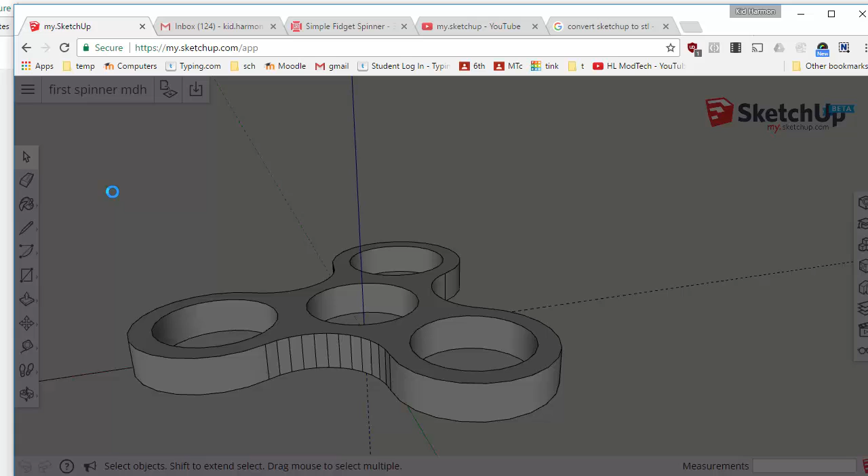I want to create a brand new design, so I'm going to go down to the templates. I always make mine with millimeters because I have intentions of printing them. This little dude shows up and I'd like to delete him.

Today I'm going to make something super simple and show you the steps on how to make it into an STL file. What I'm going to do is build a simple lighthouse.

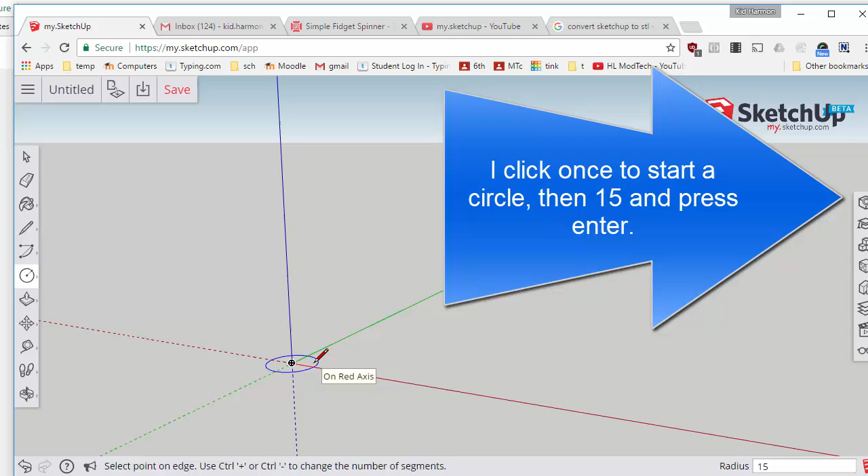I'm going to start by switching to a circle, and I always start from the center. I am going to make it with a radius of 15, so it'll be 3 centimeters wide. When I press enter, it shrinks.

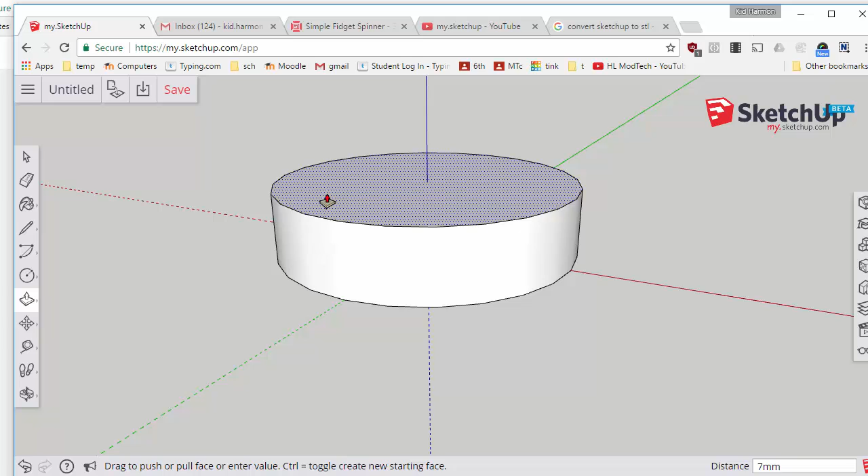I have to use my view tool so that I can get to the exact size it was. I love this zoom extents because when you make something small like I always do, that's a good way to get to it. I want to push-pull that up, and since I made it 30 wide, I'm going to make it 50 high. Then here's a cool trick I'm going to do - I'll do that zoom extents again.

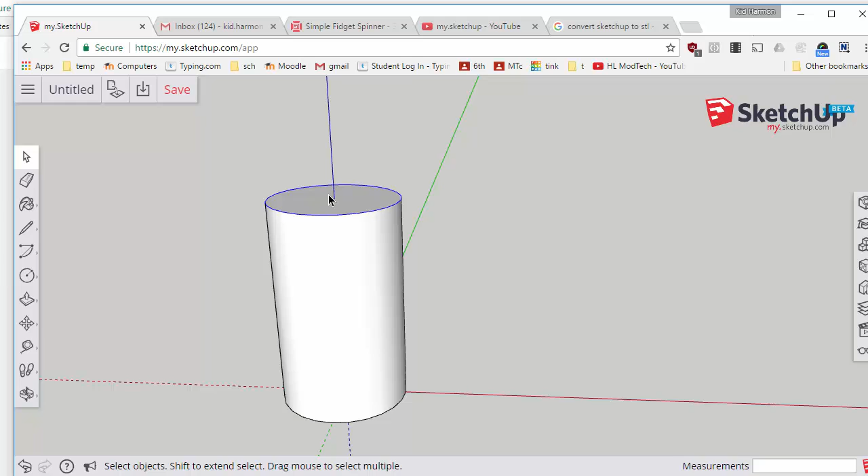If you hold down the center wheel, it lets you orbit. And then I love this trick: if you just click on the top, the outside ring, and then switch to the scale tool, you can make this a lighthouse shape by holding shift and control and making it go around center. So there's my control shift, and it's going to squeeze in the exact same amount on every side.

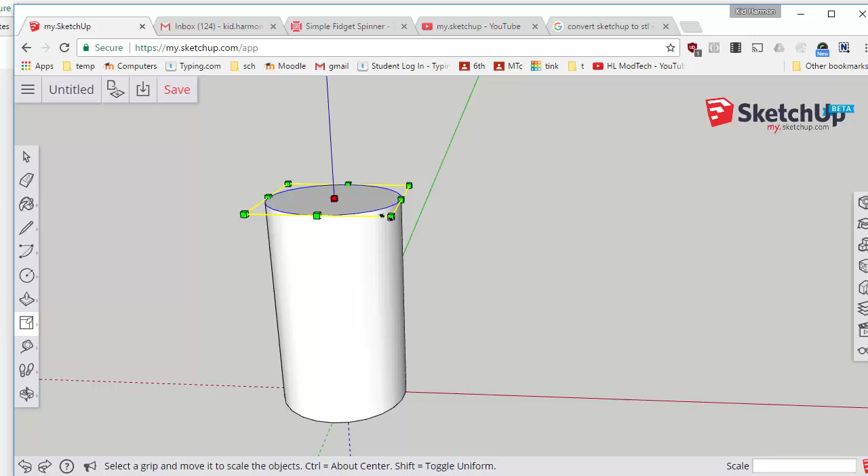It's a toggle, so I'm going to do control Z, and toggle shift. Then I'm going to hold control and make sure it comes in the same. There we go - I just had to hit shift to turn it on. Now it kind of looks like a lighthouse shape.

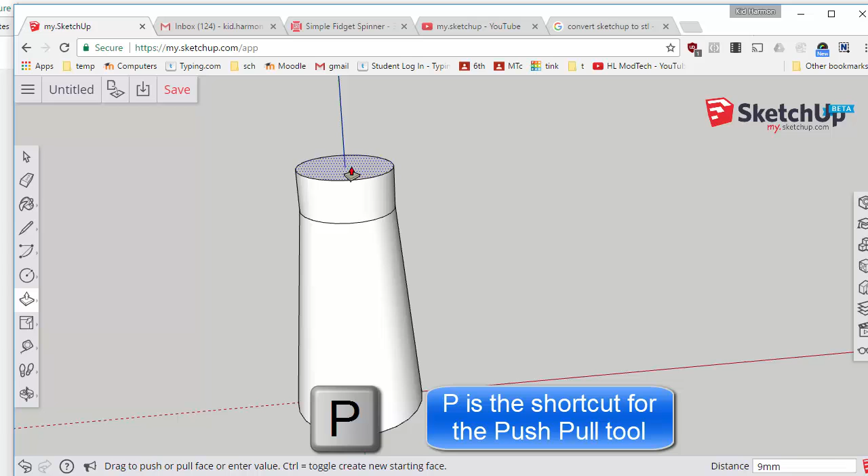I want to take this piece and lift it up so that the lighthouse has a place for the people to be in, and it'll be the same size. So I'm just going to do push-pull, and lift it up 10. Then I want to put a cone on top.

I'm going to add my cone like this. I'm going to do a straight line up, that's 10. I'm going to do a straight line out to the edge from there, and then connect it back so I've got that face.

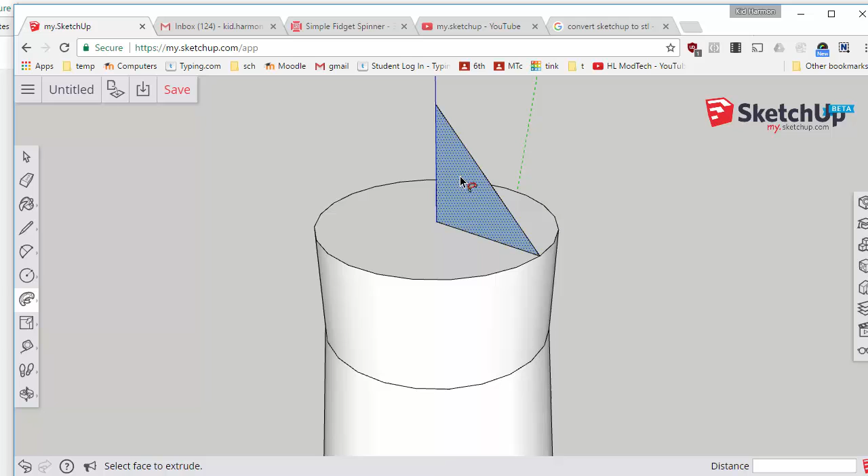Once I've got that face, I'm going to switch from whatever tool I was on to the Follow Me tool. When you click on the triangle's face and trace the edge of the circle, it creates a nice cone for your lighthouse top.

Because I'm really not building a lighthouse, my real goal is just to make something so we could export it. I'm going to hit save, put it in my SketchUp folder, and I'm going to call it Lighthouse.

So we click this dot, and down on the bottom, you can upload to the warehouse. They ask for a lot of info, and if you want to make an STL, you must make it public. You can see I've filled that in.

I will give a URL later to this video that shows you how to make it. You need to tell it you want it to be printable. Once again, if you switch it to private, they won't let you. Then you need to upload it to the 3D warehouse.

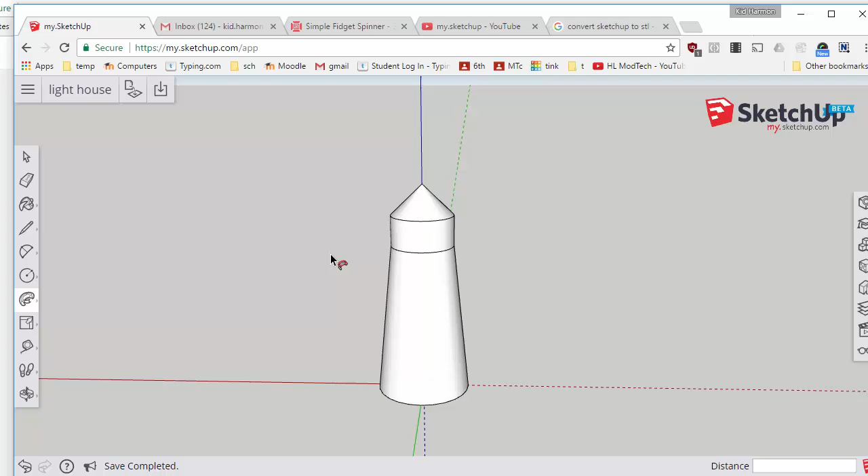At this point, you need to wait. It'll probably take 5 or 10 minutes from what I've seen so far. But I'm going to click Done, and then show you how to get to where it's going to be.

I'm typing SketchUp Warehouse. Once you get to the 3D warehouse, you need to make sure you're signed in. Since I'm in the same browser window, I am. Then when you hit this down arrow, you can choose My 3D Warehouse.

Mine finally did show up, so now I can hit on the orbit tool and it lets me look at it from every side. So now it's just like being in the system.

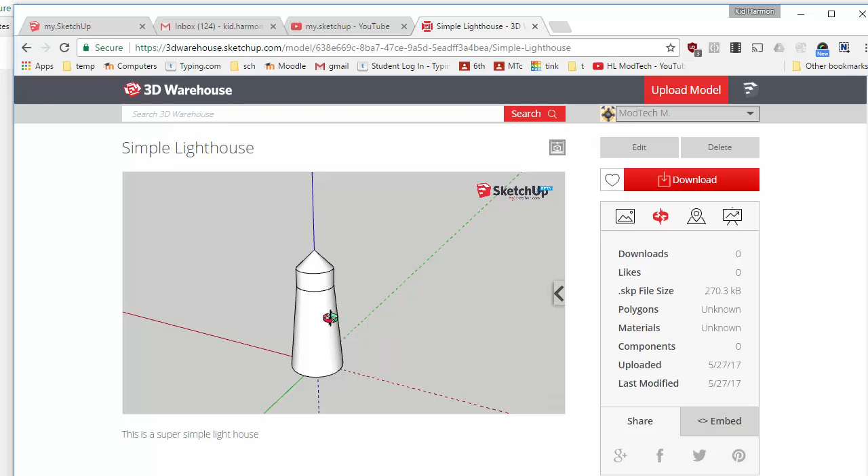I can check out my lighthouse, and then when I hit download, you can see that I could download it as a SketchUp model, but I still have to wait for the STL file.

I'm not sure how many minutes that's going to be, but I'm going to end this recording, and I'll get back to you when it is completely finished. I will share what it was like, and then I'll also 3D print it so we can see that as well.